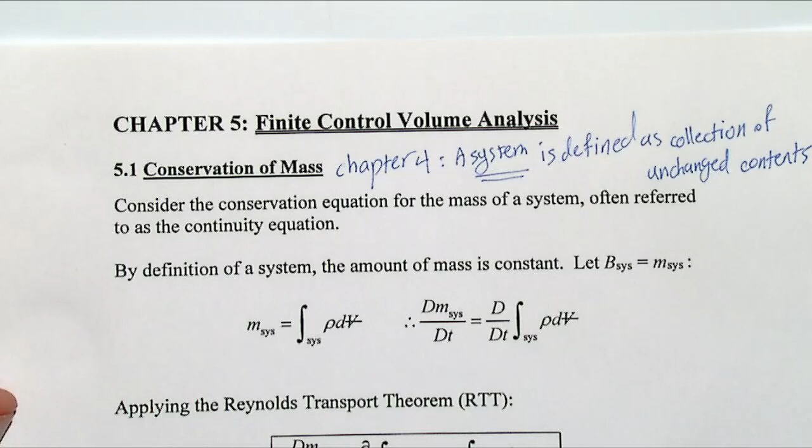What does it mean? It means you can give the particles, atoms, or molecules in a flow or fluid an identity, and say that the system boundaries are somehow defined so that this content is not going to change at all, because the boundaries move with the flow, keeping these particles inside the space covered by the system. It's like a father in a family following the kids, keeping them safe. That's the meaning of system.

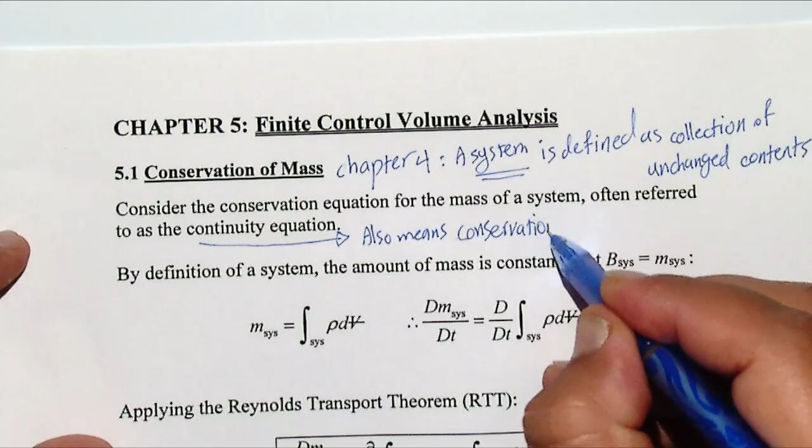If you consider the conservation equation, it means the mass of a system should be conserved, right? The continuity equation also means conservation of mass, and this is another name for the same thing. So continuity equation also means conservation of mass, there are two names for that. You can use continuity equation or conservation of mass interchangeably.

So how can we find it? First we need to define what the mass of a system is. You're going to say the mass doesn't change with time. How can you show it? You have to show that the total derivative of that doesn't change. So first, let's define the mass of a system.

Mass of a system can be defined as rho, density, times the volumetric integral dV, taken over the system, which gives you the mass.

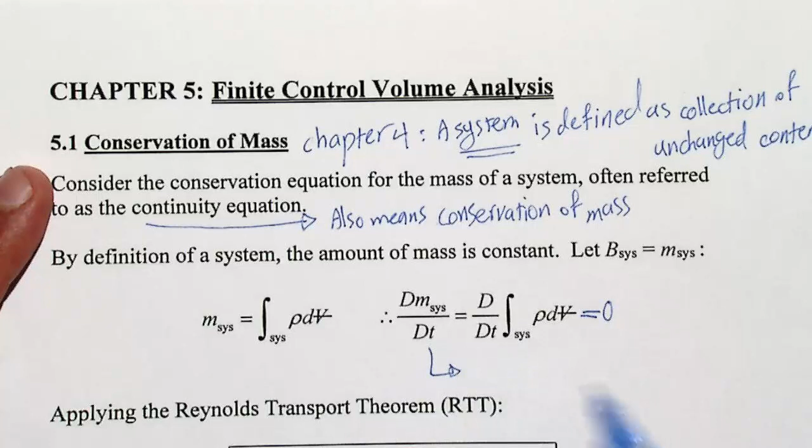Here we wrote that the total derivative of the mass of a system should be equal to, again replacing m of system with the integral equation. But what should it be? Zero. Why? Because it doesn't change. So what does it mean? It means that the time rate of change of the system mass is zero. That's exactly what it means.

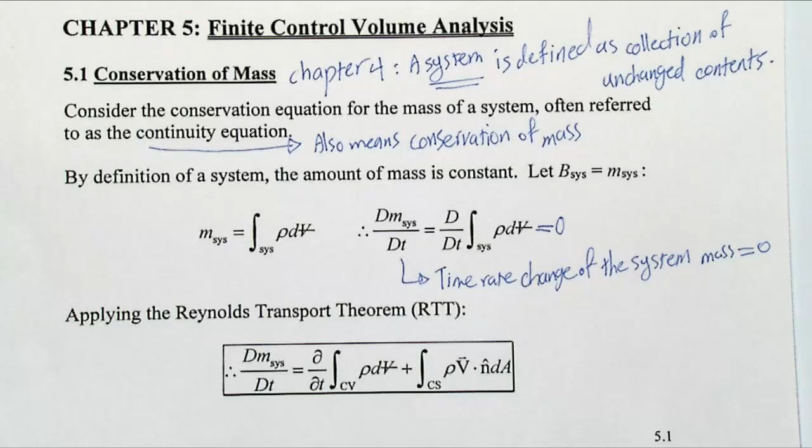Now, if we use the Reynolds transport theorem we talked about, because system analysis is based on the Lagrangian approach, but the control volume approach is much easier for us since we don't want to follow the particles. We want to answer what the flow behavior is, not track specific particles, because the flow comes in and particles change. Instead of analyzing a small or huge box moving with the system, with the control volume we stand at a specific point in space and wait for the flow to pass, analyzing it there. That's the question.

So first, remember we assumed the control volume is fixed and not moving. Why do we assume that? We assume the control volume should be fixed in space, but it's not always like that. Sometimes the system mass is moving with the flow, and sometimes the control volume also moves, and you need to answer those types of questions. We have an example for that, and you'll understand more about it. But for now, let's assume as before that the control volume is fixed in space.

So if you apply the Reynolds transport theorem, it means defining what the derivative of the mass of a system is, right?

You remember from chapter 4 how we define the Reynolds transport theorem, which is the relation between system analysis to control volume analysis. It's the time rate change of the mass of system in control volume, and also the net rate of flow of mass through the control surface. So we have three terms here: term 1, term 2, and term 3.

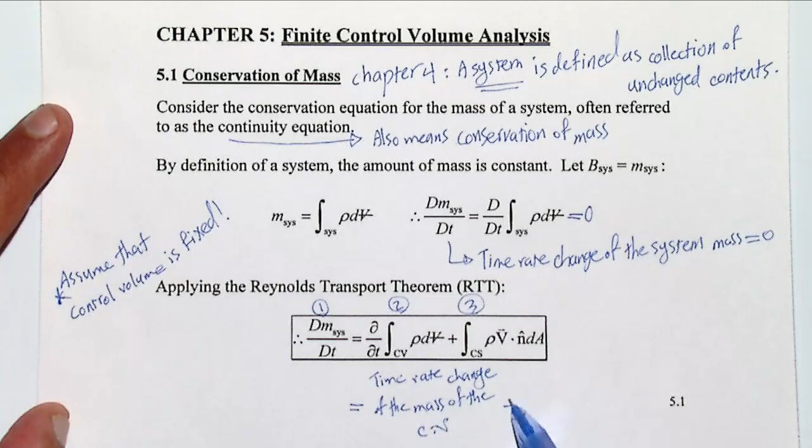If we define that, this is going to be the time rate change of the system mass, which we wrote above, but it should be equal to what? It should be equal to the time rate change of the mass of the control volume plus the net, which is term 1 and term 2, right?

What is that? It's the net rate of the flow of mass through the control surface, right? So that's the second part.

And what would be the summation if the mass of system doesn't change, as we wrote above? If you don't have any reason for that, like combustion, that sucks the mass and changes it to another product, then you can say that the total derivative is going to be 0. And if that's 0, then also this is going to be 0, right?

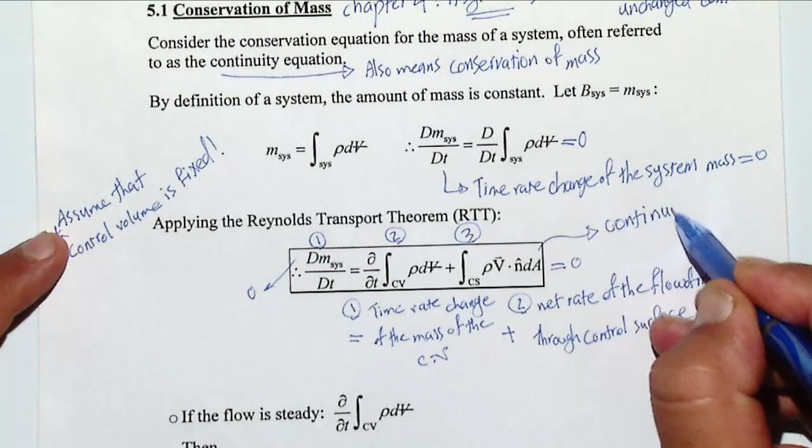And what is the name of this equation? This is the continuity equation, or conservation of mass. So that's the way you can write it down: if I'm going to apply the continuity equation, then I can apply this equation, right?

What you should do is find the time rate change of the mass inside the control volume plus how much of the mass is the net mass that is going to pass through the control surface. That's it. That's the whole thing you have to do.

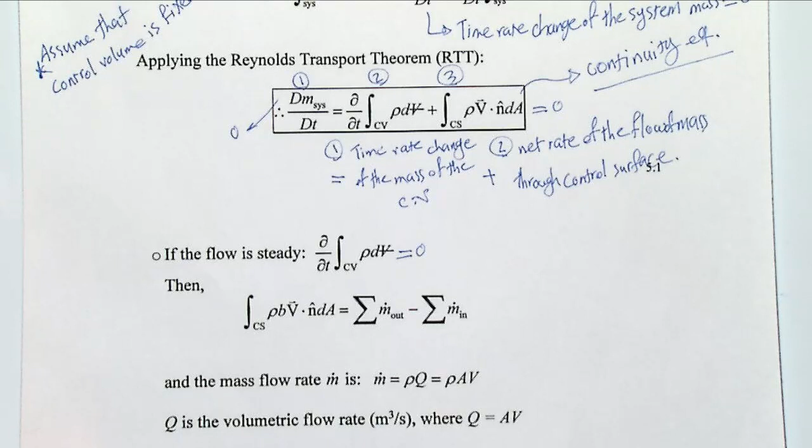But what assumptions can we apply to make it easier to solve the equation, because fluid mechanics is based on assumptions, right? So what you do to make it simpler, you apply assumptions. For example, one of the assumptions most of the time is that the flow is steady, and if the flow is steady, then the time rate change, or local term, goes to 0.

Then the only term left is the second or third term in the continuity equation, which is the integral over the control surface of rho v dot n dA, and v dot n is the component of velocity normal to the surface.

Then if you have, for example, a pipe, you can say that over the pipe wall there is no change because nothing moves over the walls, but you have only input and output. Then your velocity is always normal to the input and output, and you can find m dot out and m dot in. The summation of those, deducting the amount of mass that goes out from the amount that comes in, could be 0 if that's steady.

That's how we can apply the continuity equation on a closed surface like a pipe, where the wall or shape and input/output are very simple.

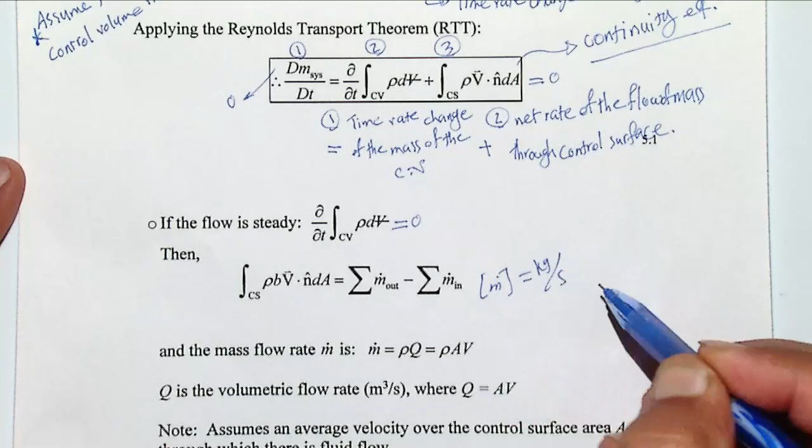Okay, so what else do we have here? We first need to define what m dot is. M dot has units of kilograms per second, which means mass flow rate, so that's the mass flow rate.

And mass flow rate can be defined using the volume flow rate. We had that before: mass flow rate is equal to density times volume flow rate, and volume flow rate is area times velocity. If you check the units, multiplying the unit of area and the unit of velocity by the unit of density, you will finally get kilograms per second.

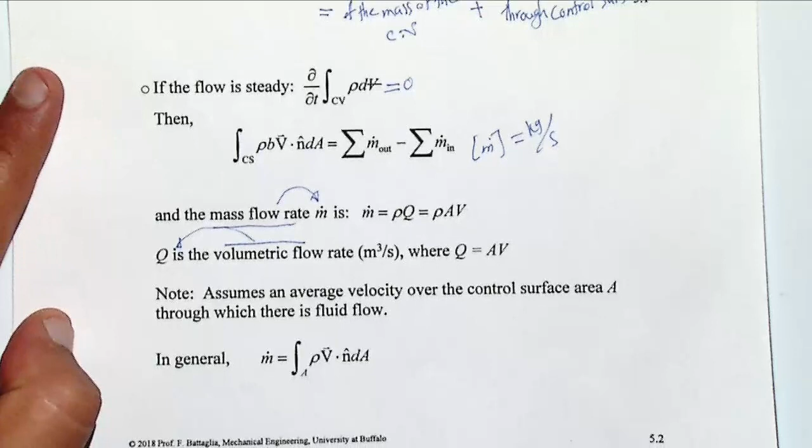What else can we assume here? If you have a velocity going out, but sometimes it's not that uniform, right? If it is uniform, then you can say v dot n is constant v, and over any differential area dA, I can apply that as just rho A v.

Why do we use rho A v? Because we assume the flow is uniform, so it doesn't matter which differential area you consider; the multiplication is going to be constant over the whole area, and you can bring it out and make the integral easier.

But how else can we do it? If we assume the general form, m dot is equal to the integral over the area, which is our control surface, of rho v dot n dA, where v dot n is again the normal component of fluid velocity perpendicular to the area, times dA. But we know this is going to be equal to rho A v, with a bar on v, because this term can be assumed equal to the average velocity. So that's how we can find the average velocity.

dA over rho A. For example, if you have flow passing through a channel or pipe with a known velocity profile, you can find the average by first defining your differential area, then taking the integral of the normal velocity over that area, summed over the whole area, divided by rho A. This gives you the average velocity, located at the center of the surface. That's how we find the average velocity.

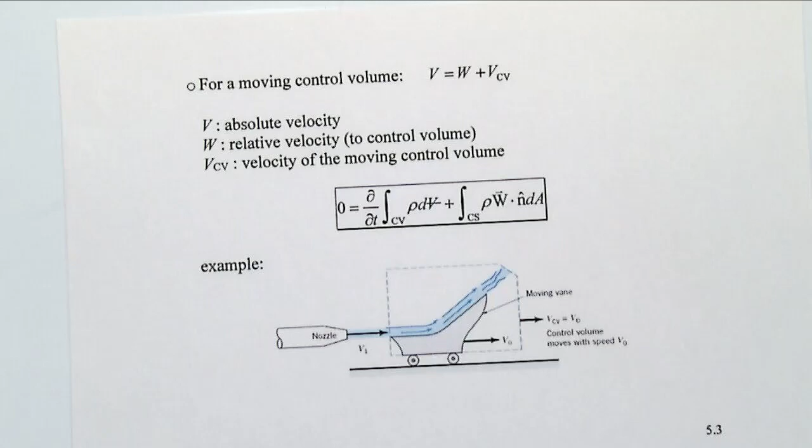Now let's move on and talk about another assumption. Previously we assumed the velocity of the control volume is zero, meaning the control volume doesn't move. But sometimes it does move, and it's easy to account for that.

For example, you have a jet that comes and hits a car, and because of the jet's momentum, it moves the car. That car is the control volume. The control volume is a space you assume as a screenshot of the flow, the space where you analyze how the flow moves.

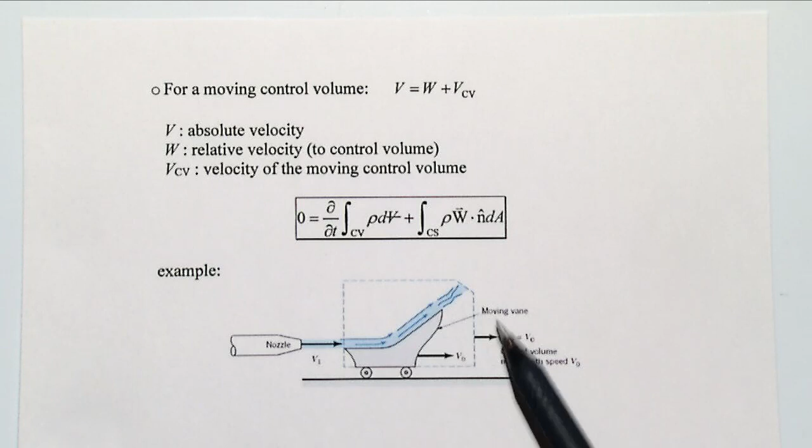So what happens if the item moves? You get a camera and stand somewhere to analyze the fluid, but if it moves, you also have to move, because you want an analysis from here to here. So sometimes the whole flow moves, and then the control volume should move too, because while it's fixed in space, it also needs to give you boundaries that stay fixed relative to the flow.

It's like getting a camera to follow your kid. You have a child playing, so you put your camera somewhere to record video of them playing. What happens if they go out of the camera's view? You need to turn the camera. It's still fixed in a space, but the main object you're analyzing is your child, and if the flow moves, your control volume should move too.

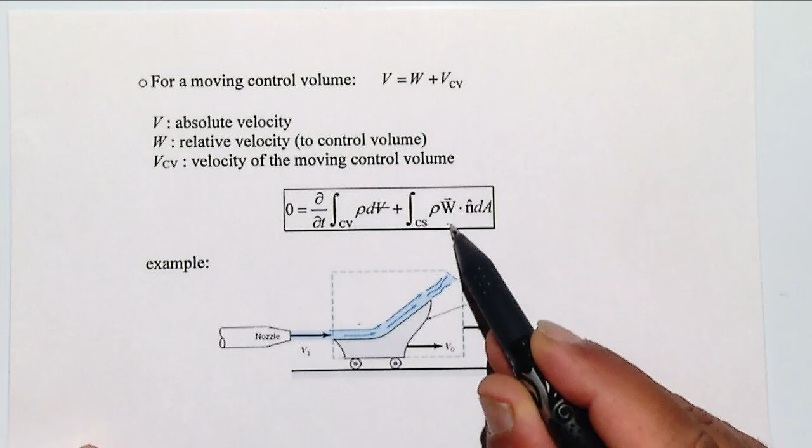So what happens to the continuity equation? Nothing, really, you just use the relative velocity instead of the flow velocity. You have a velocity where flow comes in and goes out, like v1, and another v elsewhere. Previously we used that flow velocity directly for the continuity equation if the volume was fixed, but if it moves, you have a relative velocity between the two. So you replace the flow velocity with a relative velocity and apply the continuity equation as before.

The continuity equation is still valid, nothing changes except that you now use W, the relative velocity. So again, you can say the control volume is fixed, so V0 is zero, but instead of considering the velocity here as V, I will consider it as W, and assume that this is my velocity.

For example, you have a camera and your object is a car. You get the camera and record video from the car while it's standing still and stopped. But when it moves, you're also in another car moving with it, so then you have a relative velocity.

You want to see the car, but at the same time you also should move with it because it's going to go out of the view of your camera. So maybe your object's velocity is 100 miles per hour, and you have 98 miles per hour. What you see in the camera is that the car is moving with 2 miles per hour in a direction. That's what you are going to analyze with your camera.

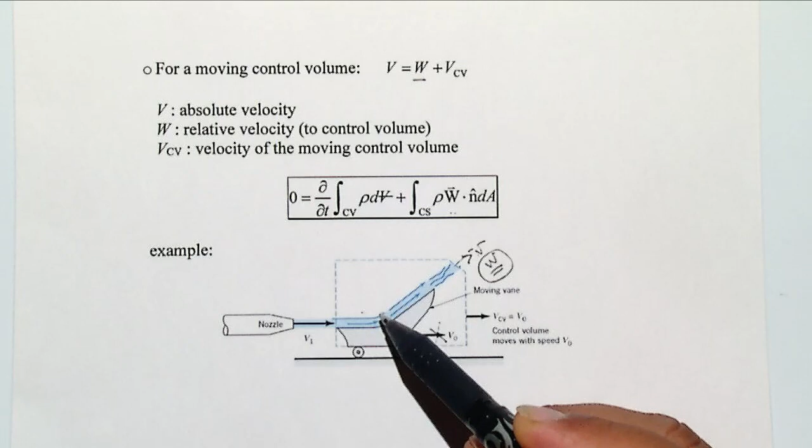Here it's the same. Instead of considering the flow passing with velocity v, you consider that the control volume is fixed. There is no velocity here, only what is the input, output, or whatever the flow is. What is the relative velocity, and replace it here in your control volume.

I'm going to talk about something much more important than the moving control volume, something mostly mathematical. If I ask you to change this equation because you have two integrals, to change it to one integral, you are not allowed to do it, because one of those is control volume and one of those is control surface.

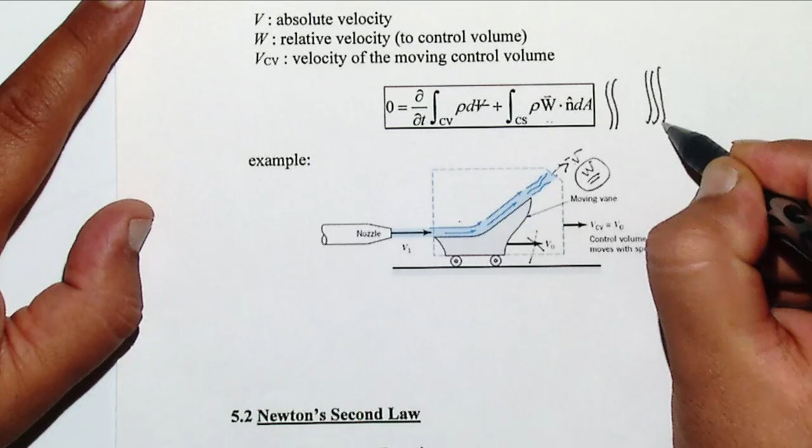So you have a second order integral, a third order integral. We'll show one with the surface, like 2 over the surface, and the other with 3 over the volume. This is going to be your volume, and that's going to be your surface. Over the surface and over the volume is not going to be mixed or merged. That's hard - you cannot merge these two.

But again, in fluid mechanics, you want to make it simpler, right? That's where the mathematics comes in and helps us. How? Using the divergence theorem. So what is the divergence theorem?

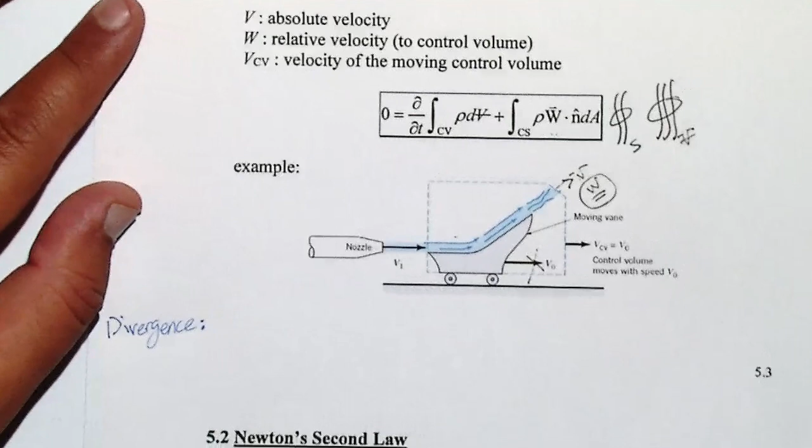Divergence theorem is a theorem in mathematics that you don't need to know how to prove - just use it, because proving a theorem is sometimes very hard. The divergence theorem changes the surface area integral, the integral over the surface, to an integral over the volume, using a gradient and divergence, getting the divergence of that term.

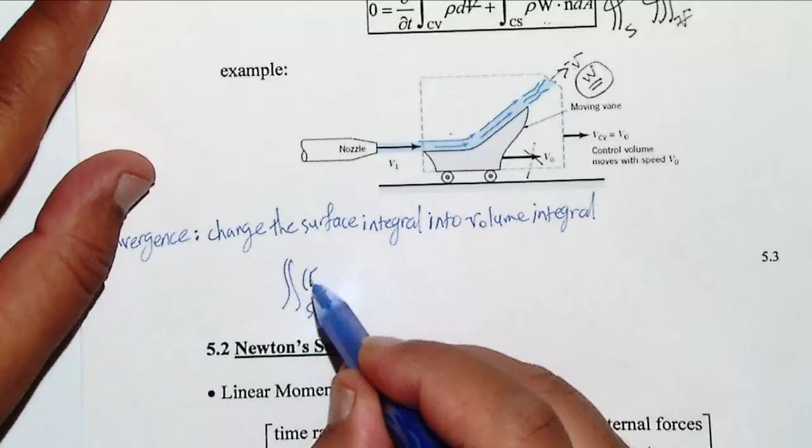So how did it change it? Divergence theorem first changes the surface integral into a volume integral. How? By using this equation: over the surface, if you had any f dot n ds, it would be equal to over the volume of the gradient dot f dv.

So if you apply that to anything that has f dot n, over the normal component of any parameter or any vector normal to the area, then you can use the divergence theorem and get a volumetric shape of it.

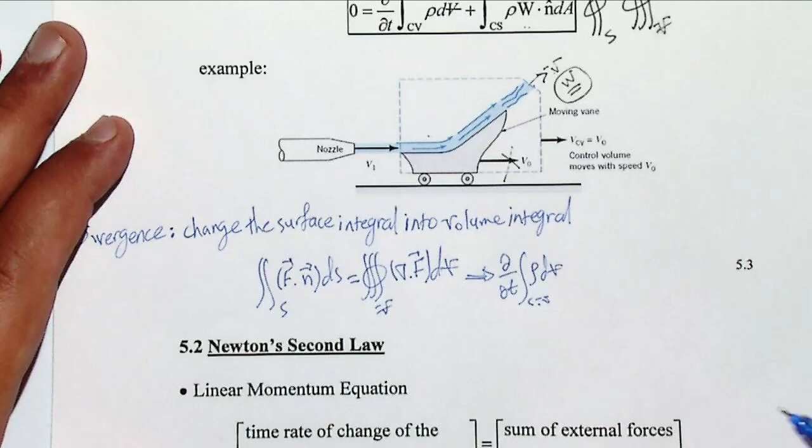So how can we apply that? What will happen here? It's easy. In the continuity equation, the first term, which is the integral over control volume of rho dv, we keep that - nothing is going to change.

But the second term, which is rho v dot n ds - rho is out of the v dot n, and will be considered after that. If we say rho v is going to be our f, then we apply the divergence theorem to make it control volume, and the integral is going to be over dv, but here it would be gradient dot f, gradient dot rho v.

Why did we do that? Because we are going to merge these two and say now I can write it as one integral over control volume, one term, because now I can sum up these two - the dv is the same and both integrals are over the volume. So: d rho/dt plus gradient dot rho v, dv, equal to 0 - that's the continuity equation.

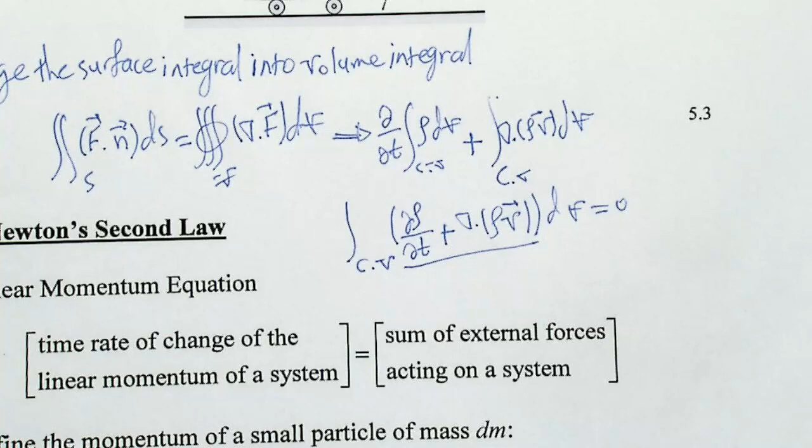So now I've changed that to this form. I will show again how you can make it simpler and bring rho out with some assumptions. But for now, just keep in mind how we can merge these two integrals - one control volume based, the other over the control surface - into one integral using the divergence theorem.

Up to here I wrote down how we can bring rho out and merge it with this one, but that's an additional topic because it's not part of this chapter. I only need to give you a hint, because I'm not going to teach chapter 6 for this course - we don't have time for it.

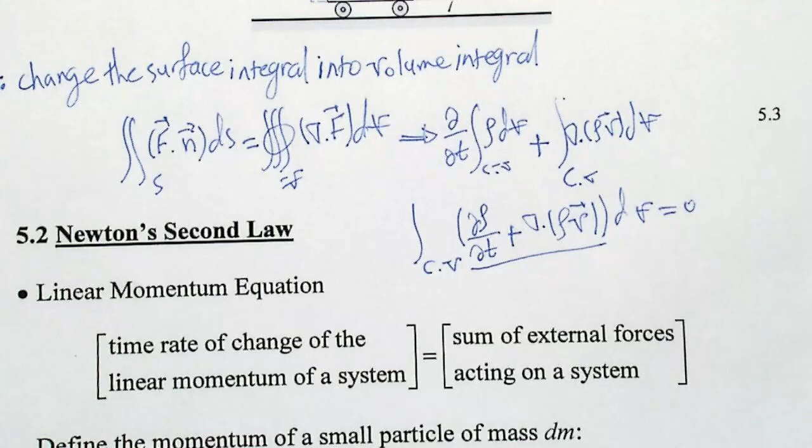So just only two, the most simple but most important terms that you have to learn in this course. If you say you're going to pass fluid mechanics, you have to know it. And that's two terms: dilatation rate and vortex, and the angular velocity component. We'll talk about it later. So till here we talked about the continuity equation.

Okay, now what's next? Next is Newton's second law, which is linear momentum. We say that rigid body motion is valid here in fluid mechanics, so we are going to apply that over the fluid, and again over fluid particles, and then using the system or Lagrangian approach, using the transport theorem, Reynolds transport theorem, bring it extended to the whole flow. That's what we are going to do.

First, linear momentum is going to show that it's based on rigid body motion: the time rate change of the linear momentum of a system is equal to the sum of the external forces acting on the system. That's Newton's law. If you have a net force, then the momentum is going to change in the direction of that force. Net force direction is going to change your momentum in that direction.

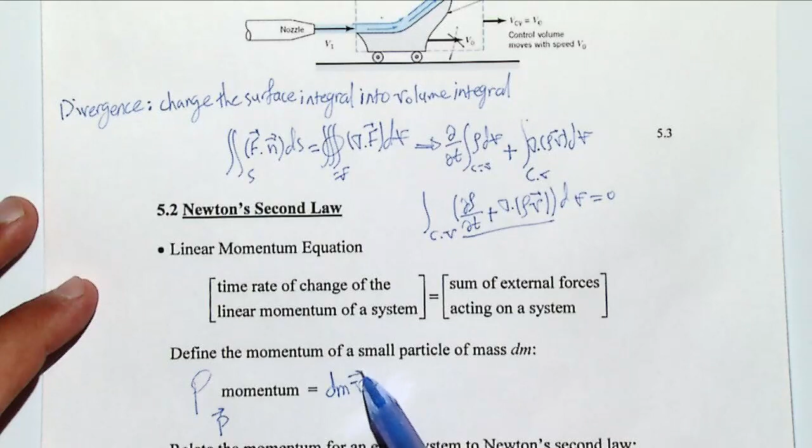What is the momentum of that? dm times velocity gives the momentum, and the name of momentum is capital P. We wrote capital P because the book used that, and momentum is a vector, right? It is equal to dm times velocity. It has to be a vector because mass is scalar, and velocity is a vector, and if you multiply this, you will finally have a vector. That's why momentum is also a vector.

But dm could also be replaced by rho dv. So if we use this, we can have the momentum of that small particle, that is p, equal to rho velocity dv.

So if our system moves with this particle, then we say that the momentum, over time, the total derivative of that should be 0, or should be equal to the force, right? Because that's mentioned here for rigid body motion. Then we can say that d over dt of p, or momentum, should be equal to the net force acting on the fluid particle. That's valid because that's the meaning of Newton's second law.

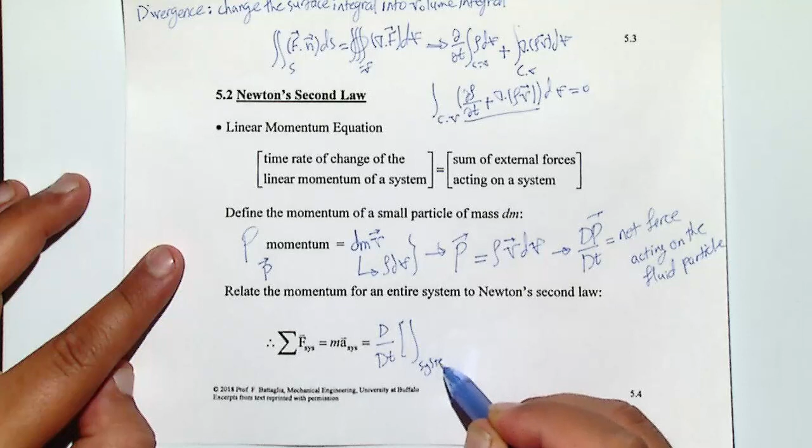So in this system, we can replace the net force with the mass times acceleration of the system, right? And you can write that sigma of all the forces, which is our net force, is equal to d over dt of the integral over the system of rho velocity dv. That's what we can write down here using Newton's second law.

And what else do we need to do? We need to use the Reynolds transport theorem, transfer, which moves from system analysis to control volume analysis, or Lagrangian approach to Eulerian approach. Find this equation like this one, and then we can also apply the divergence theorem and merge these two integrals and have a final equation for control volume, right?

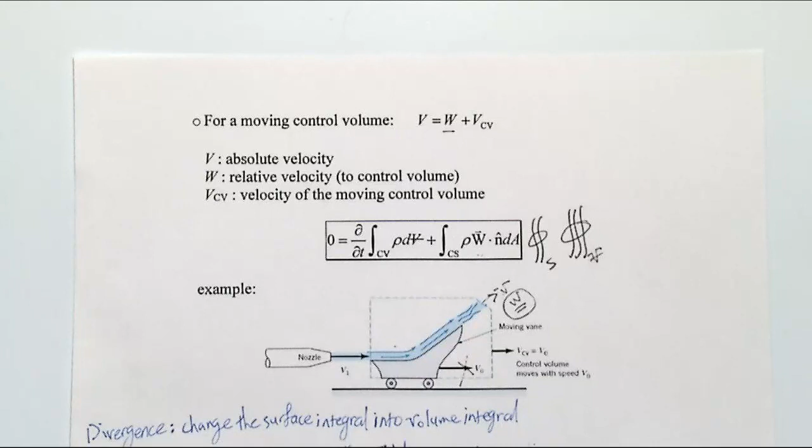Again, both of them are going to work. Mostly in the homework that I gave you, you have to use the dA form because that's much easier. But control volume based, or merging these two, are going to give you the Navier-Stokes equation, which is for chapter 6, and we don't have time to cover that right now. But you will see different versions of the continuity equation, and since those are highly mathematical with the terms, it makes you mix these two, thinking oh, these two are different, but these are not different. These are only using the mathematics to merge the integrals and rewrite the equation. But again, the meaning of that is the same: continuity equation and momentum equation, based on this first and second Newton's law.

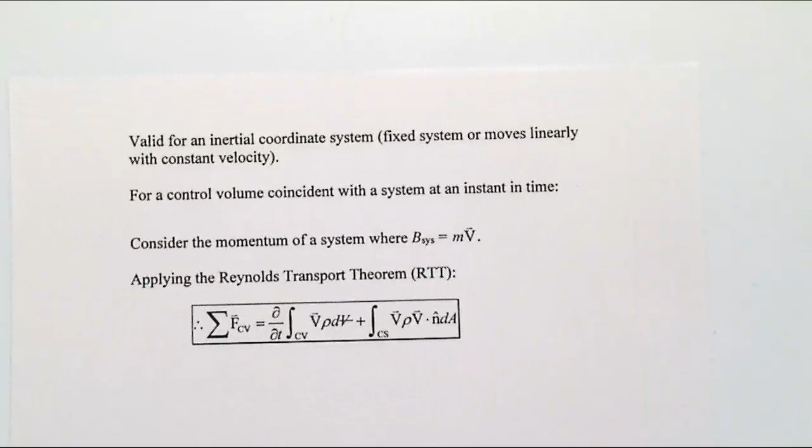So here, what we can do is apply the Reynolds transport theorem on the equation that we have. If you apply that, then the force over the control volume is equal to the time rate of change of the momentum in the control volume, plus the amount of momentum that passes over the surfaces.

Okay, so this is the same, and then we can apply the divergence theorem and have a better shape of it, merging these two. And again, you can write that sigma F of the control volume is equal to the integral over the control volume, bringing the rate into the equation, and you will have v rho, or rho v, doesn't change anything, and then plus the gradient, because this is going to be your f now, gradient dot v rho v, and finally all times dv.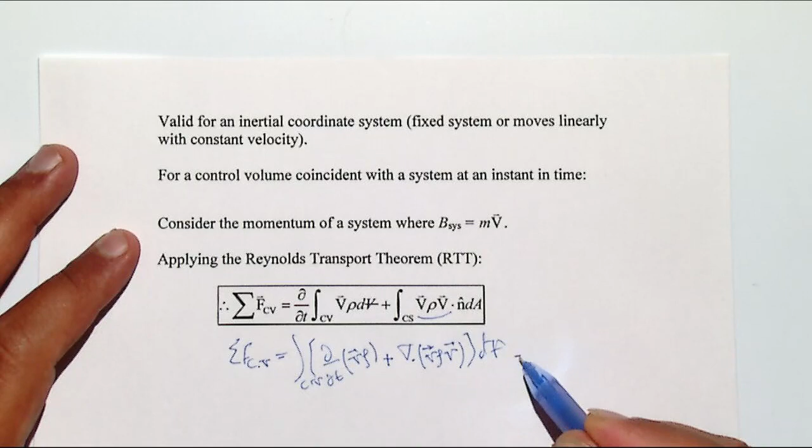That's it, you merge these two integrals. Also, mathematically you can bring one of the rhos out and make it simpler, but right now don't worry about it, because it's not part of this chapter or any part of this course.

Okay, so what else? We are going to define what are the forces on a control volume. What type of forces act on a control volume? We have two types, or sometimes you can assume three types, but generally it's two types: body forces and surface forces.

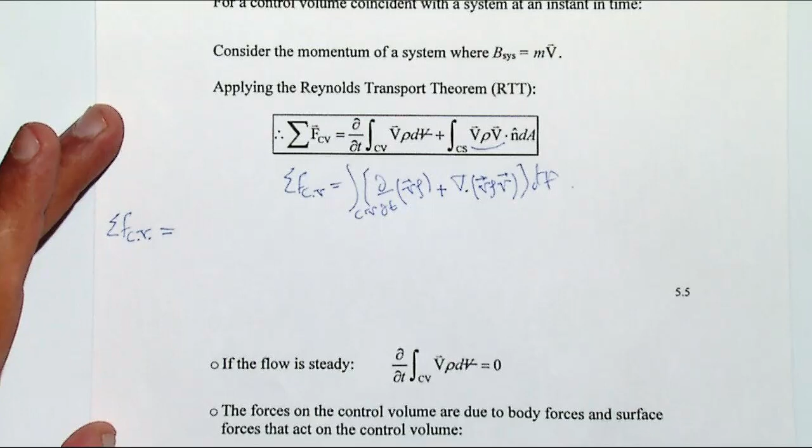So the sigma of CV, or control volume, is generally two types: surface forces and body forces.

For example, pressure force is a type of surface force. Tau, that's the friction type force, is a surface force, but weight of the fluid is a type of body force, right?

These are different types of forces, and all have to be summed up, and the net of those should be equal to the change in linear momentum in the control volume, which is equal to the net force acting on the control volume, which we write down here.

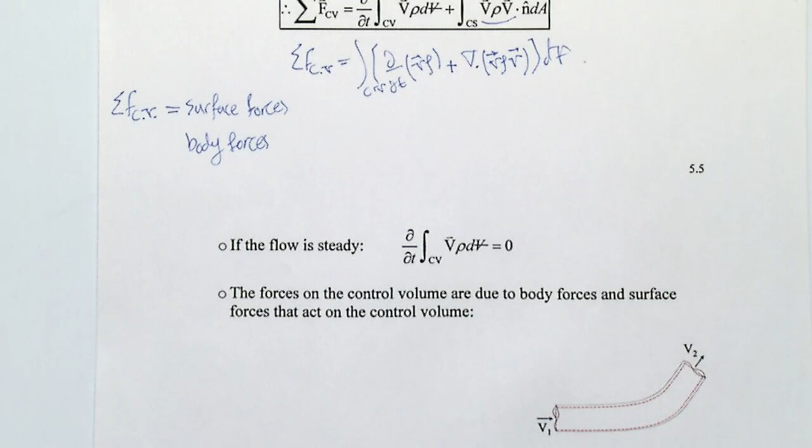Okay, so again we are going to talk about assumptions. What is the first assumption we can apply here? If the flow is steady, then the time rate of change of the linear momentum is going to be zero.

What else? Just defining the forces, then we can write it down: what is the amount of the net flow of momentum over the control surface? Then the sum of all is equal to the net force acting on the control volume.

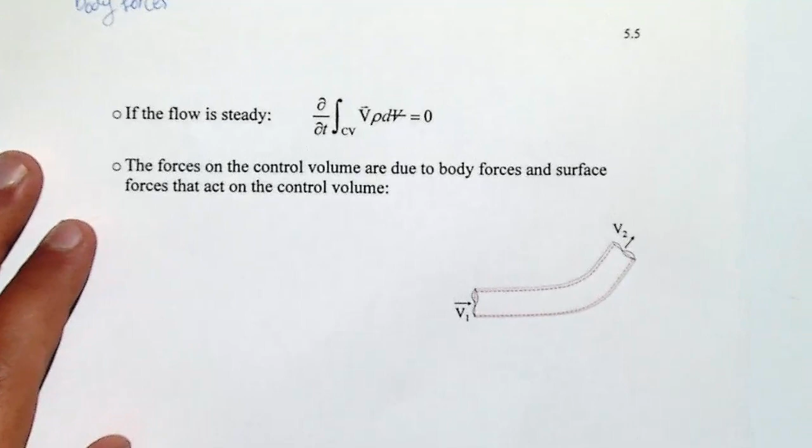So here, in this simple example, I'm going to write down the different types of forces. That's why you need to analyze.

First, define your control volume. That's the first thing you have to do. First, define the control volume, and we show it with this. Okay, that's my control volume.

What is the control volume? That's also part of the question, how you define the control volume. You have to decide where your boundaries are, and what space you are going to analyze. Sometimes just defining the control volume changes your question from a very simple one to a very hard one. If you define the boundaries in a bad way, then analyzing it is mathematically very hard, or sometimes impossible.

But only by putting the boundaries in the correct point can you make assumptions that simplify the solving of that question. First, define your control volume, and we write it down here with the red dash line. And let's write what is the... okay.

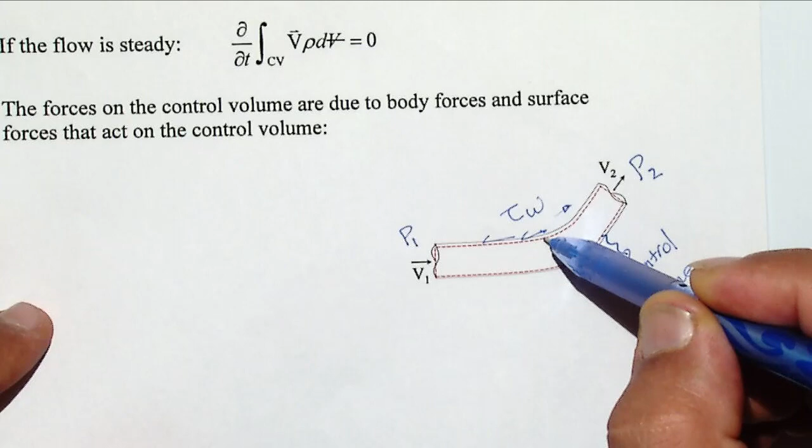So velocity comes in, comes out. You have pressure 2 here, pressure 1 here, and you may have the tau at the wall. Tau at the wall is the force the fluid acts on the wall in this way, but the reaction of that is going to apply on the fluid in that way.

So that's a type of reaction force. That's why sometimes they categorize the forces into three: surface forces, body forces, and reaction or external forces. These are not really different - the tau is also part of surface force. In general you have body force and surface force as the most important ones, and tau or friction force is part of surface force.

Okay, so what are the forces here? First, another force we have is the W of fluid, which is gamma V - that's the weight of the fluid. So the body force in this case is fluid weight.

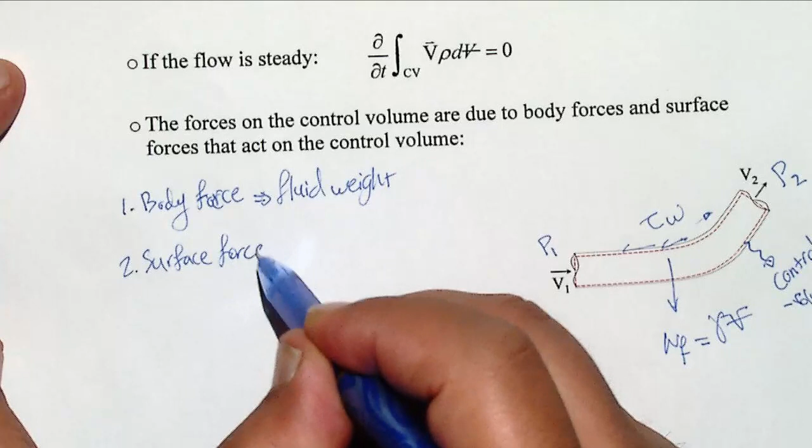And surface forces: one is P1A1, which is here, right? That's the pressure at this area, and it's going in this direction. And another one is here in that direction. So P1A1, P2A2. Also another type is tau of the wall times the whole area of the wall.

And also, what else do you have? If that's your control volume, you shouldn't say you just have a wall here. In the analysis you'll understand that, okay, I have a pressure here, and also I have a pressure here. If you have atmospheric pressure all over the space, then you have a pressure force on the wall and also on the control volume.

All of these are going to cancel each other out. That's why we don't consider atmospheric pressure, because you have atmospheric pressure here and here. You don't need to assume that, as long as the atmospheric pressure is everywhere. These are your pressure forces on the wall, and here also you have it, but the summation is all going to cancel out because one has a corresponding force in the other direction. That's all the forces.

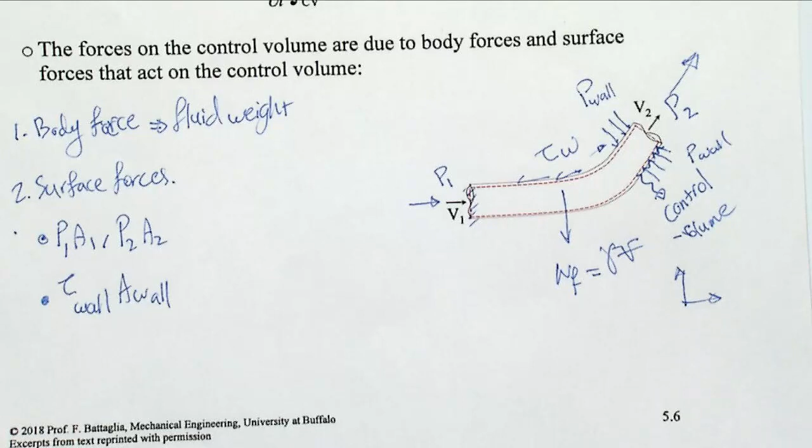So how do you do that? Okay, I will write down all the forces here. First you need to assume what is x and y. So I'll assume x and y are here, that's my x, that's my y. And because that's direction based, you have to write down what is in the x direction.

For example, in the x direction, one force is going to be P1 A1, it's simple. What else? One component of velocity, P2 A2, if that's the angle, there is an angle here, right?

So it's theta. The other one is in the other direction, so this is going to be your component, and it's going to be negative. So minus P2 A2, if that's theta, so that's going to be times cosine of theta. Okay, that's also another force.

What else? You have to sum up all the tau, and if the angle is for an arbitrary shape, you have to get the integral over the area. So it's going to be negative, integrated over the area of the wall, tau wall times dA.

What else? You have the fluid, but the fluid in the y direction. Also one of the components in the y direction is the pressure forces. You don't worry about those because we're only writing in the x direction.

What else? Now you have to write how much the momentum is changing over the control volume. Since it's steady, and you assume it's steady, the first term is going to be 0. What about the second term? You have to write down how much momentum comes in and goes out. If that's velocity, you will see that n here is going to be in this direction, so v dot n is going to be negative.

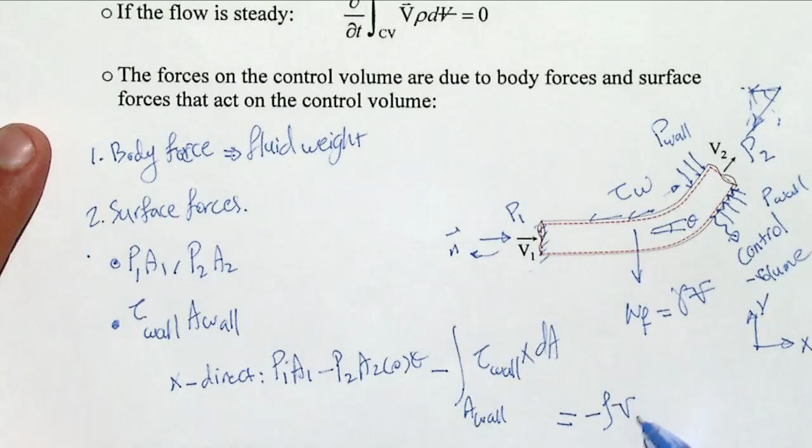Minus rho v1 squared times the area A1 is going to be the amount of momentum that comes in with a negative sign, plus here is going to be positive because n and v are in the same direction, and rho v2 squared times A2 is going to be the amount of momentum that goes out.

So that's it. You have an equation here, then you can find, for example, what is the velocity that is going in or going out. That's the way you can solve questions in chapter 5 based on the continuity and momentum equations.

In this part, it's much easier to use the surface approach without the divergence theorem, like the first one. But using that other method is going to be hard. That's why we have two versions, and you have to decide which one is easier to use based on the question. It all depends on the question. But for this chapter, and for this course, you will mostly use the first one.

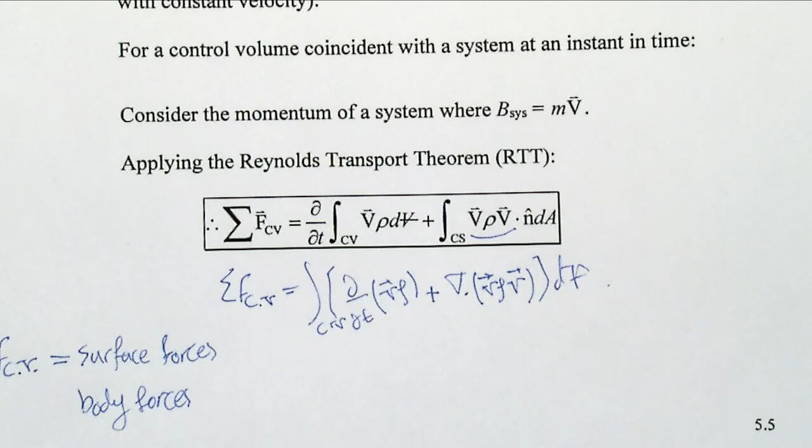This is only for you to know more about, and for your future, but the first one is mostly used because the questions we discuss, in the exam and also in homework, it would be much easier. Don't worry if you couldn't understand this part, but you will need it in the future if you do research in this area.

Okay, so I told you before, fluid mechanics is based on assumptions. What does it mean, based on assumptions? You have to make assumptions and make it simple. That's it, that's the whole thing about fluid mechanics.

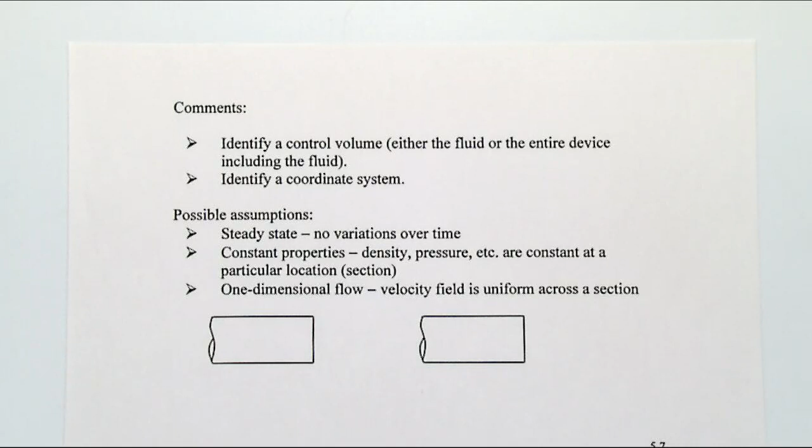The comments are going to help you solve a question in this chapter. At first you have to identify a control volume. It could be the entire device, it could be the fluid, it's based on your assumption and your question and your solution. It depends how you are going to solve it and what control volume you have to decide. By solving different questions, you will know more and more how you can define the control volume.

Then you need to also identify the coordinate system. Why? Because you can define which is the direction, and if you remember from the example that we saw for the arbitrary channel, you will need it because these are velocities and momentums, and those have a direction. So everything is based on direction.

What else? You can make possible assumptions like steady state, no variation over time, so that first term is going to be zero, or you can say density is constant, then the flow is incompressible, then I can make it easier and bring the rho outside. What exactly I did in the question: I assume the flow is uniform, then for rho v squared, I bring the velocity out, the area out, and make it simpler.

This is one of the assumptions I applied, that the flow is one dimensional and not changing across the section. That means the flow is uniform. If the flow is uniform, the velocity all over the cross-section area is equal. So this is going to be a uniform velocity profile.

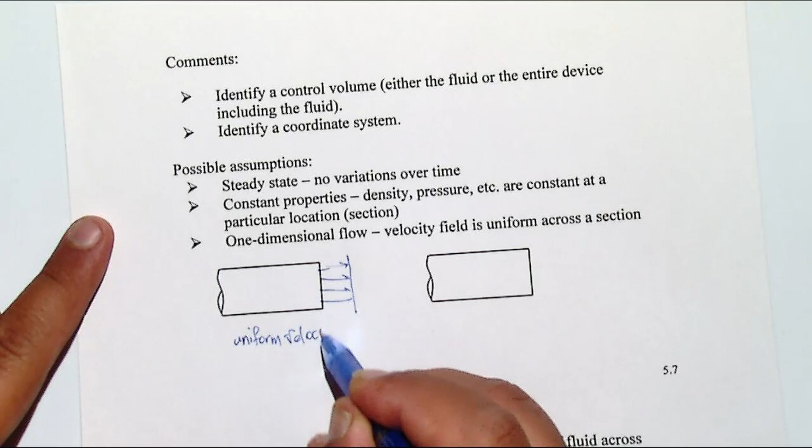But sometimes you don't have it. You may have a non-uniform one. If you have a non-uniform profile, you can assume the average velocity somewhere there and make it easier, or you have to get the integral and solve it mathematically. But it all depends on that.

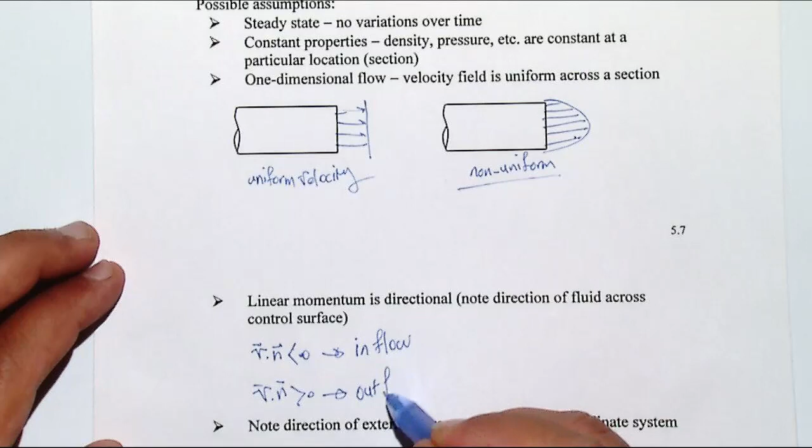What else can we assume to make it easier to analyze a control volume system? Linear momentum is directional, so the direction of fluid matters when it's going out or going in. You have to know that, same as before, when v dot n is negative, that's inflow, and if v dot n is positive, that's outflow. Same as before, we applied that for chapter 3.

And what about the forces? Direction of external forces with respect to the coordinate system matters. That's the example that we wrote down. We solved that for an arbitrary shape, but here we make it easier and rewrite it.

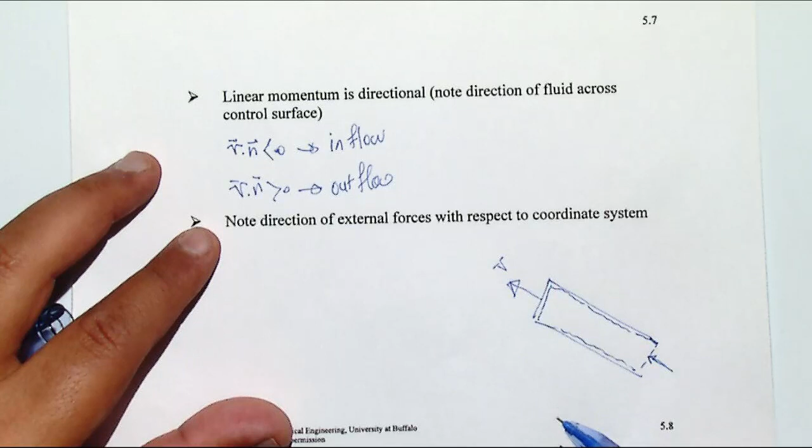Absolutely, if you consider you have a boundary velocity here for the control volume, you have to also assume that you have another velocity down there. But it just wants to make it easier and solve for only one of the surfaces. But yes, when you close your boundaries here, you cannot assume it's infinity and going for a long pipe. You have to cut it somewhere, and that's your control volume. You are limited in space, and you have to assume where your control surfaces are, and since you have a velocity coming in, then you have a system or a fixed control volume here, and then you are going to analyze that.

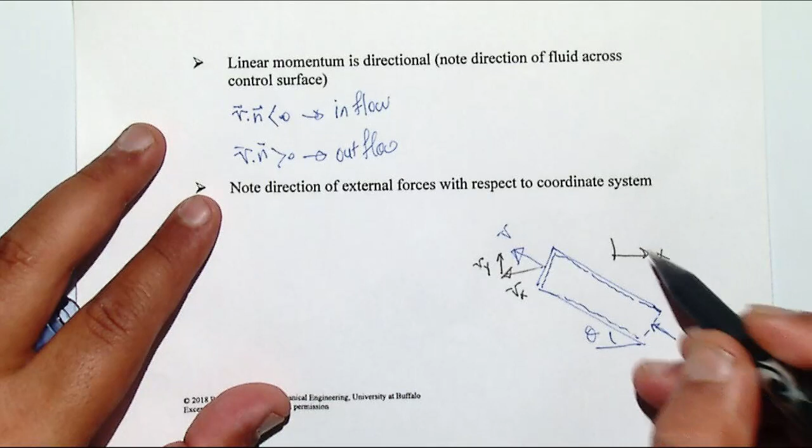But if you have an angle here and a velocity there, this velocity has two components, Vx and Vy. If I assume this is my x and y, then Vx is going to be negative here, and here Vx is going to be positive, Vy going to be positive. Same here when it comes in, two components of velocity. So if that's V1, we can write V1 and then V2 here, for example. This is going to be V2x and V2y.

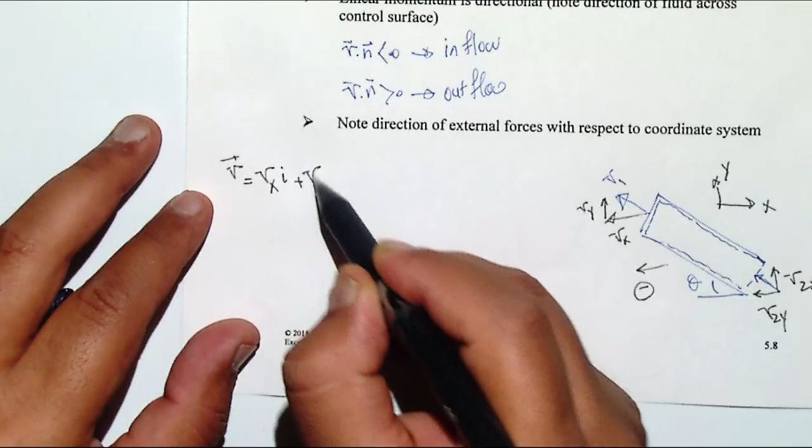This is the negative direction in x. So you can write at first what are the components of velocity. You can write it as vx*i plus vy*j. Just consider that I'm writing that for v1. These are only examples. So what would be vx? Vx is going to be minus, because that's the negative direction, times the magnitude of the velocity times cosine of theta.

If that's theta, then this is going to be your theta, and v is the amount of velocity times cosine of theta. And what about vy? It's going to be amount of velocity times sine of theta.

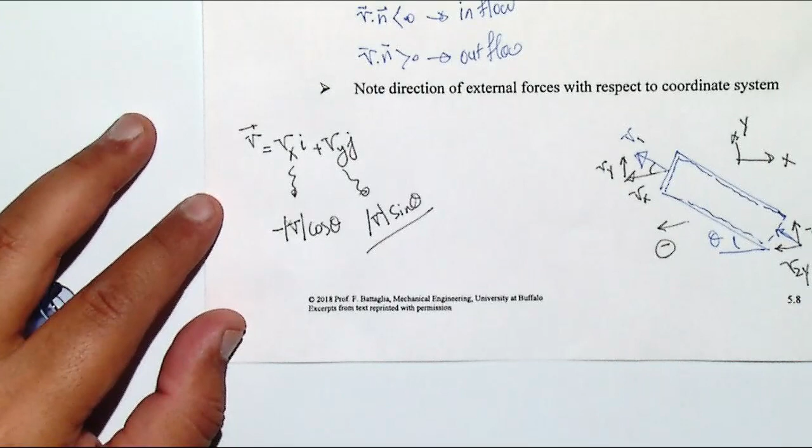You replace that, and in integral form you can apply that in x and y direction. How? You assume this is a steady state flow, so just applying for output. We'll talk about input and the whole question later in the examples, but let's apply just for output. So the time derivative term is 0, and then you only rewrite the second integral, which is the control surface term: velocity, rho v dot n, times dA.

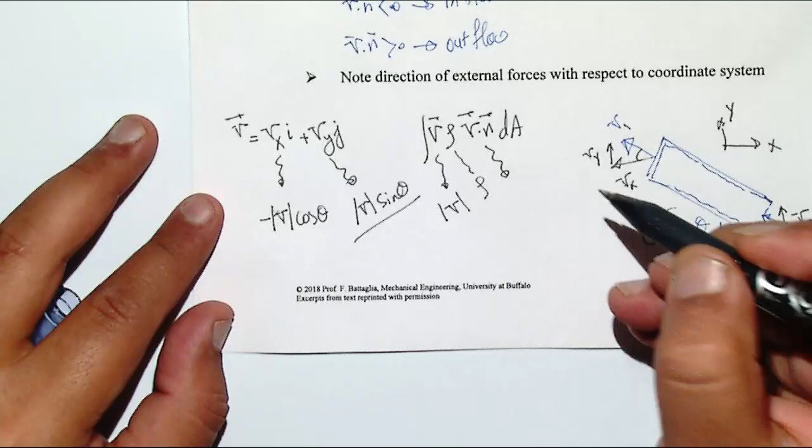So if you write it down with the amount, v is the amount of v, rho is rho, and v dot n depends on the direction. If you write it down for the x direction, it's going to be minus v cosine of theta. And what is dA? If you assume a uniform velocity profile, you can multiply that by the area.

So in this output you have one term in the x direction, which is the multiplication of all these: minus v cosine of theta, times rho A v. Rho A v is your m dot. And this is your vx. Then in the x direction you will have m dot vx.

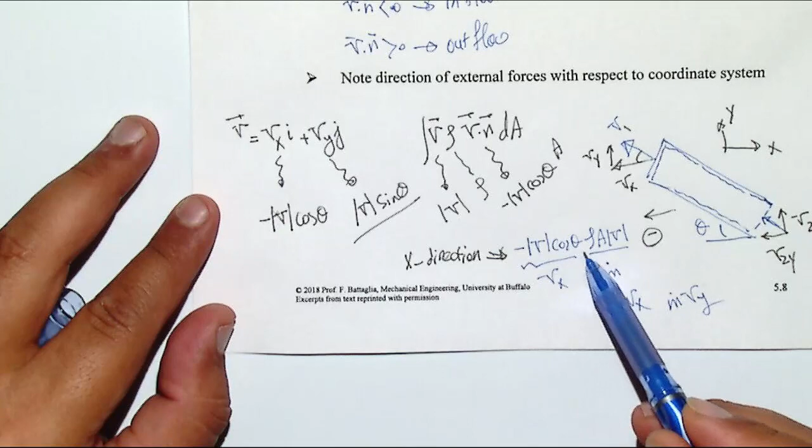What about the y direction? You will have m dot vy, the same multiplication: sine of theta times rho A v. That's for the second term.

That's it, that's enough for now. We'll solve a bunch of questions next class. I'll show you how to apply it in a real question and how to make it simpler and solve it. But before the end of this class, I'm going to talk about two additional topics here.

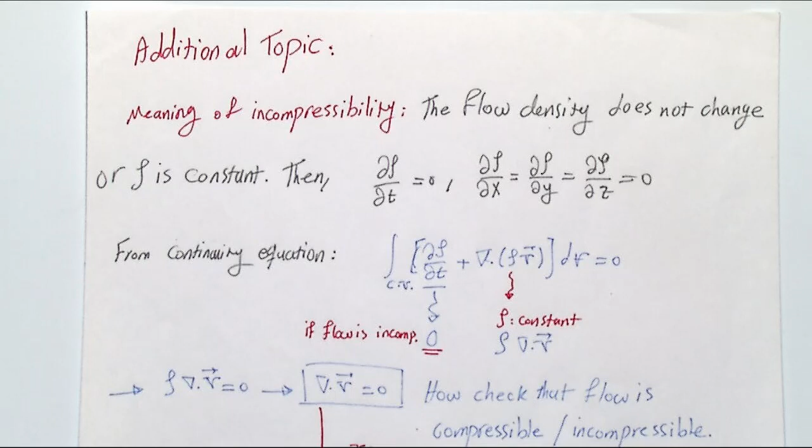One is the meaning of incompressibility. So what is the meaning of incompressibility? Incompressibility means the flow density does not change, not with space and not with time. So it's totally incompressible, meaning rho is constant everywhere in the flow and also over time. So if rho is constant, then all the derivatives are going to be 0. Perfect, so you can apply this.

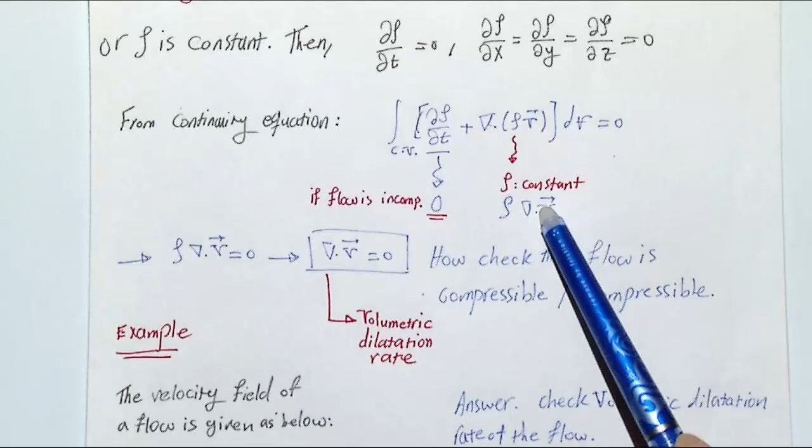Let's write down the continuity equation here. If you write it down and apply the divergence theorem, you will have, based on the control volume, one integral: time derivative plus gradient dot rho v in the dV, which is going to be 0. Since rho is constant, assume that rho is constant, then all the derivative terms go to 0, and rho being constant comes out from the gradient. This is 0 because the flow is incompressible, and rho being constant comes out, so finally you have rho gradient dot v.

So this is 0, and if the integral is going to be 0, then the only term that remains should be 0. If that's 0, then we can write that rho gradient dot v is going to be 0, and since rho cannot be 0 - density is not going to be 0. If density means 0, it means that for a volume of fluid, your weight or mass is going to be 0, which is not possible for a material. It would mean that you don't have anything there, so it cannot be 0.

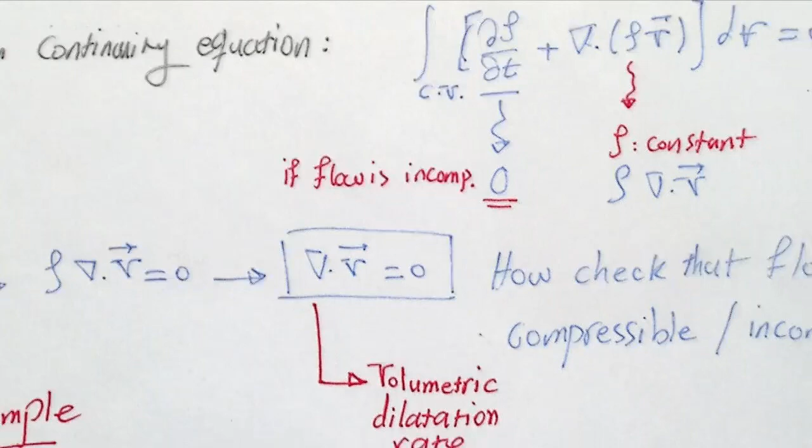Then the only term that is 0 is gradient dot v, which is the volumetric dilatation rate. That's simple so far but very important. Why? Because when you have a velocity profile, if you get gradient dot v, or find the volumetric dilatation rate, and it's 0, you can assume the flow is incompressible. If it's not 0, you cannot say that - you can say it's compressible.

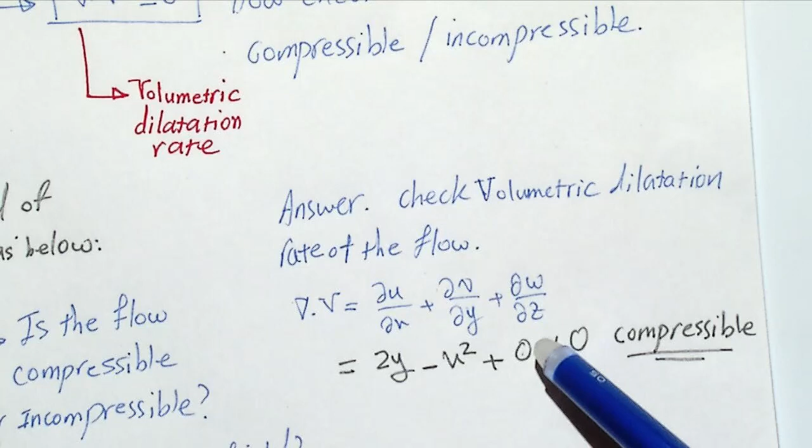For example, a velocity profile is given: u is 2xy, v is minus x squared y, and w is 0. Just assume it's 2D. So the question asks whether the flow is compressible or incompressible based on the flow velocity. What you should do is check the volumetric dilatation rate and find it. So gradient dot v is du over dx plus dv over dy plus derivative of w versus z. What is the derivative of u?

Derivative of u versus x is going to be 2y. And what about this one? Derivative versus y is going to be minus x squared. So the answer, and also this is 0, so that would be 0. What would be the answer? 2y minus x squared. It's not 0.

Absolutely, if y and x are 0, it means that for a single point in space, yes, it would be incompressible. But we are not talking about a single point, we're talking about the flow. Flow has a space, it has time, and you're not getting that. Only for one point, mathematically, would this be incompressible, but not generally. So the answer is yes, the flow is compressible because the dilatation rate is not 0.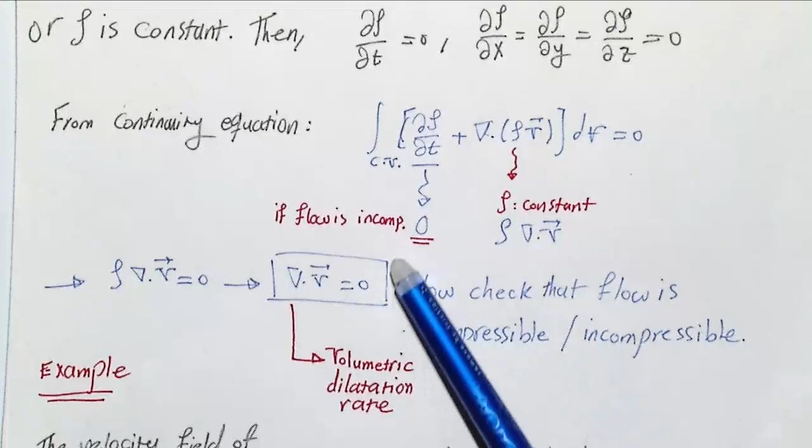Why does a nonzero dilatation rate mean compressible? It comes from the equation of continuity. We found out and proved that if rho is constant, then gradient dot v is going to be 0. So that's the divergence of the velocity being 0.

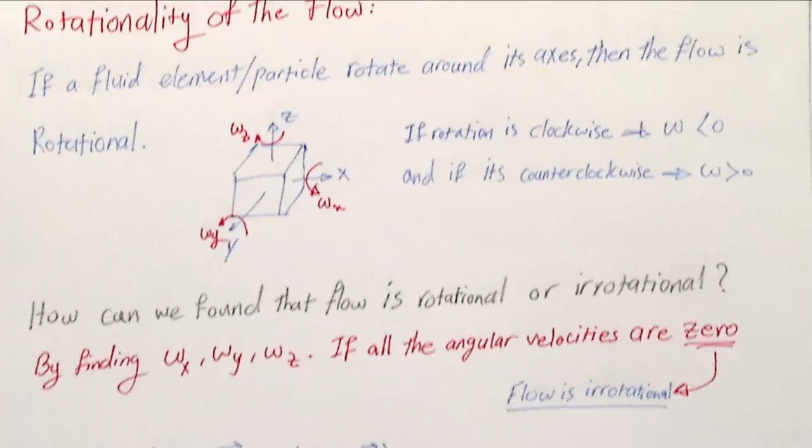Okay, that's one part. The other meaning I'm going to talk about is not vorticity now -- vorticity is more complex -- but finding the angular velocity, the meaning of rotationality or irrotationality of the flow. So we have two things.

Let's say you are running on a track field. You have a rotation when you are running. Assume that you are a particle in a fluid, running over a track field like a professional, fast moving. Because of the turning of the track field, you are turning as well. That means the flow is circulating -- you have a circulation there because you are moving in a turn.

Since you are doing the turn, I'll write it down here -- that's my track field, and you are running over that. Since you are running here, for a constant point, someone standing there, like your friend, sees that you are turning.

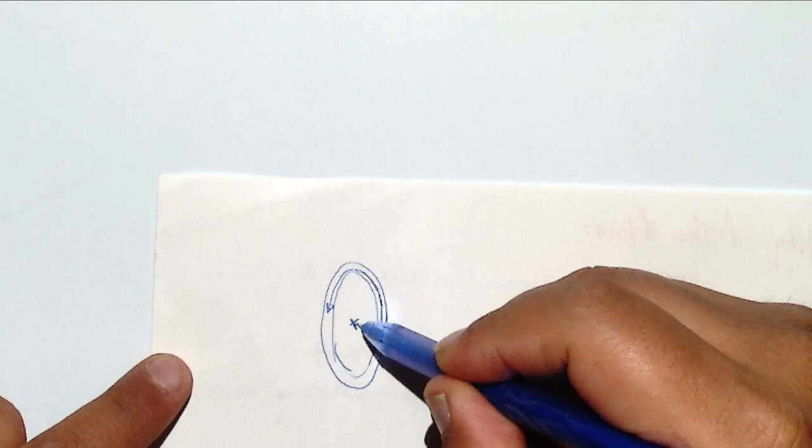So you have a circulation, but that doesn't mean that you are rotating. The meaning of rotation and circulation are different. Circulation means that the flow is circulating over a center, and you can write the radius there. But if you're running over this field and at the same time turning around yourself while running, this turning around yourself is going to be rotation.

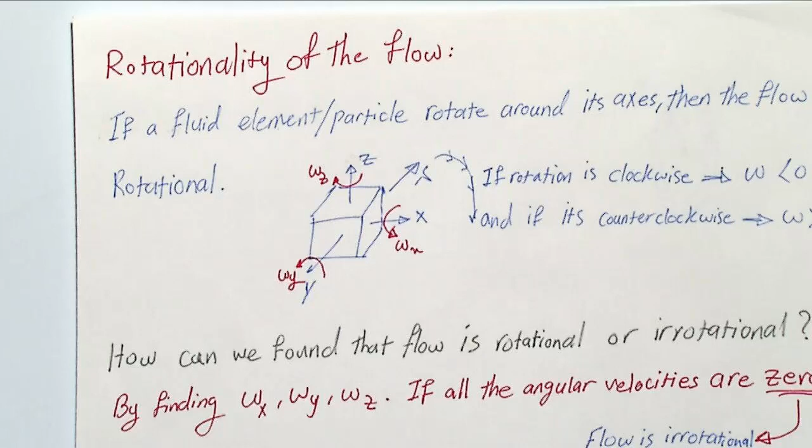So here, for a particle: the particle may move in a way that has velocity in an arbitrary direction, and also, zoomed out, you may have a circulation like turning. That doesn't mean that your flow is for sure rotational. Rotational means that at a point, or in general, the component or particle of velocity is moving around itself, or turning around its own direction.

So if the particle has an angular velocity about any of its main directions or axes, then you will have rotation there, and the flow is rotational.

So if you see a sink, for example, and the flow goes over the sink hole turning like that, this is circulation. It doesn't mean the particles of the flow are for sure turning around themselves as well. No, they are not -- they are moving smoothly, turning over the general direction. Only if they are turning about any of their own axes is your flow rotational. That's the meaning of rotationality of the flow.

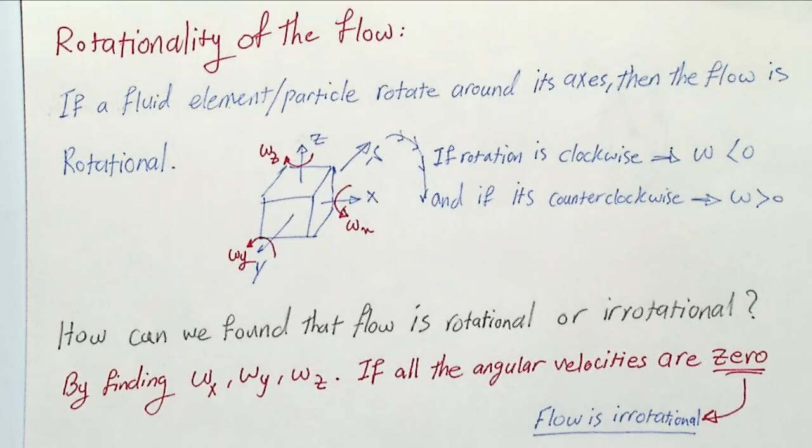But how can you check and find out that the flow is rotational or irrotational using the velocity field? That's the question we're going to answer.

At first, let's talk about the parameters. If you have z, y, and x directions and you have a rotation over there, then you have an angular velocity, shown by omega. If you have omega-x, that means you have a rotation over the x, or y, or z axis. If that's clockwise, then the angular velocity -- this is just a convention, but all the books use it -- is negative, and if counterclockwise, it's positive.

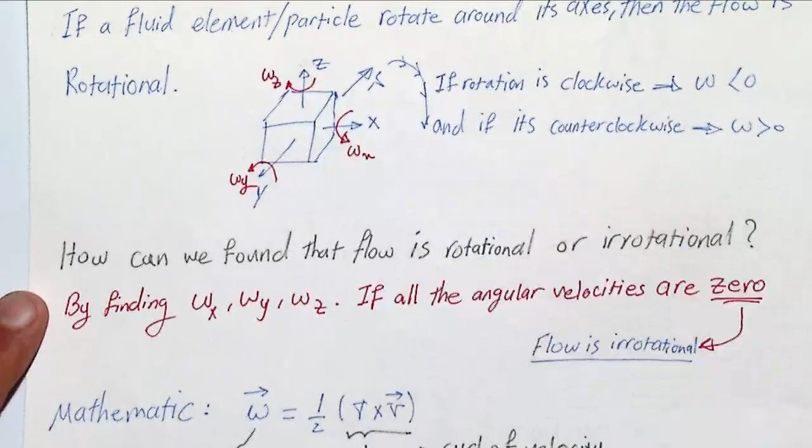The question is how can we find that a flow is rotational or irrotational. It's easy: if the angular velocities are 0, then the flow is irrotational. But if any of these are not 0, then it's absolutely rotational.

Mathematically, you can find omega, the angular velocity, by getting the curl of velocity, and you need half of it. So omega is a vector with omega x, y, and z in i, j, and k directions, and it's the curl of velocity. The curl is gradient cross v, calculated by the determinant of the matrix: i, j, k, d/dx, d/dy, d/dz, u, v, w. Don't worry about it because I wrote it down here.

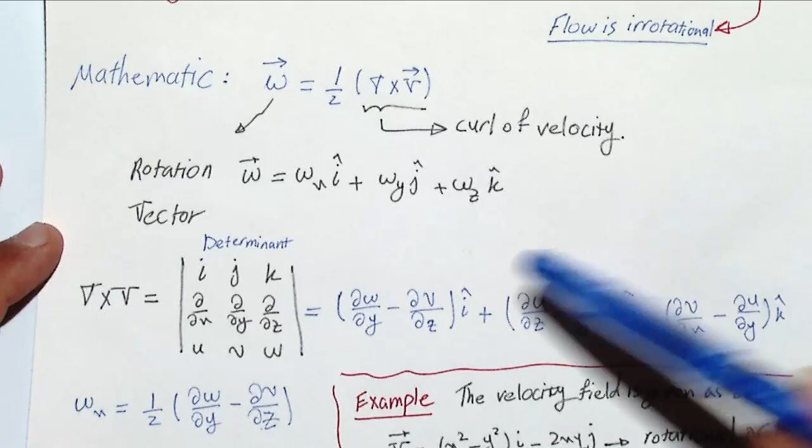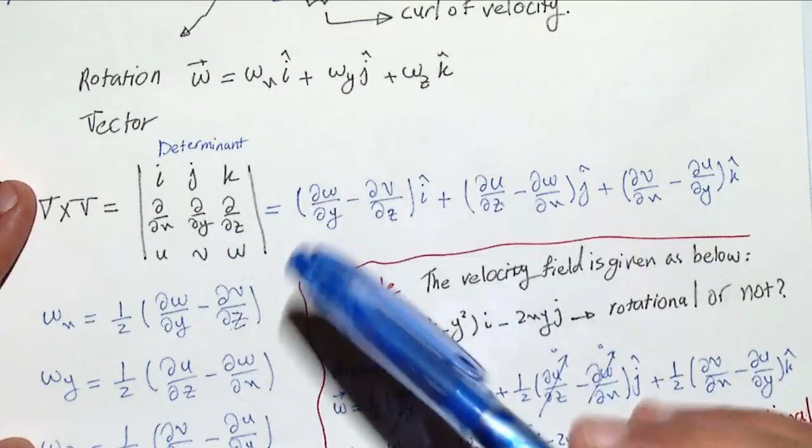You can just write this equation. I will give you access to the notes for the homeworks, and in the final you are allowed to bring an equation sheet and write it down. I will also give you an equation sheet with all these equations. So that's the simple part. If you don't know how to get the determinant for a 3x3 matrix, just Google it and find it in mathematics books.

Here would be your equation for the three omegas: omega x, omega y, and omega z. But remember, omega is half of the curl, so multiply by 1/2 on each of these terms.

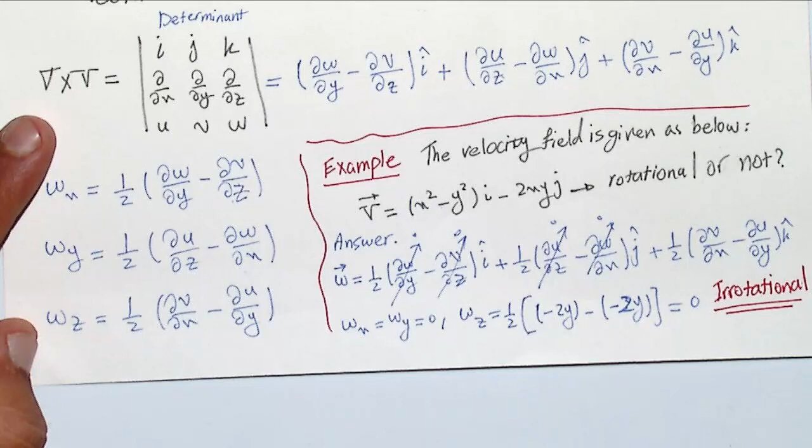Example: velocity fields given as vx, vy, and w is 0. Is the flow rotational or irrotational? The answer is you use omega and find the amount for each. Write down the equation, multiplying by half, though the half doesn't matter when checking if it's 0 or not—it only gives the correct magnitude. But keep it, because that's the correct equation for omega, the angular velocity.

Since W is 0, all derivatives of W are 0, so I make two terms 0. Also, U is not a function of Z, and neither U nor V are functions of Z, so the derivatives of V and U versus Z are both 0. So if the flow is 2D, I only have rotation over the Z axis.

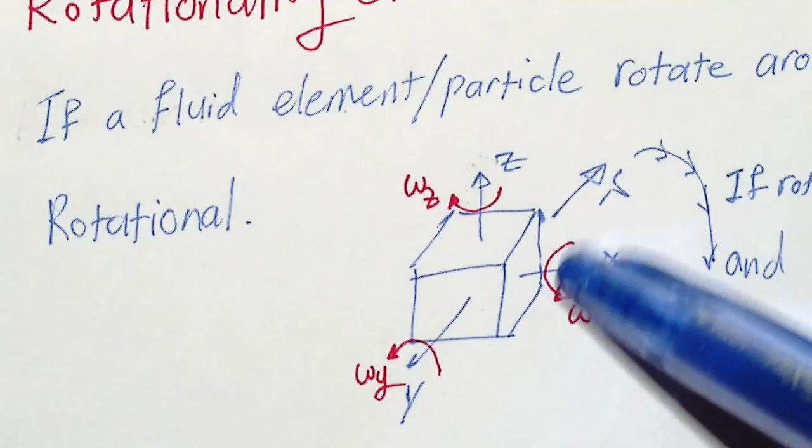It makes sense because the flow is 2D. If it moves in this way, it's not moving in the Z direction. The only way it can turn around itself is because of the velocity it has in X and Y direction, giving a rotation around Z. So for 2D flow with only X and Y velocity components, the first and second terms of omega are 0, and only the last one remains.

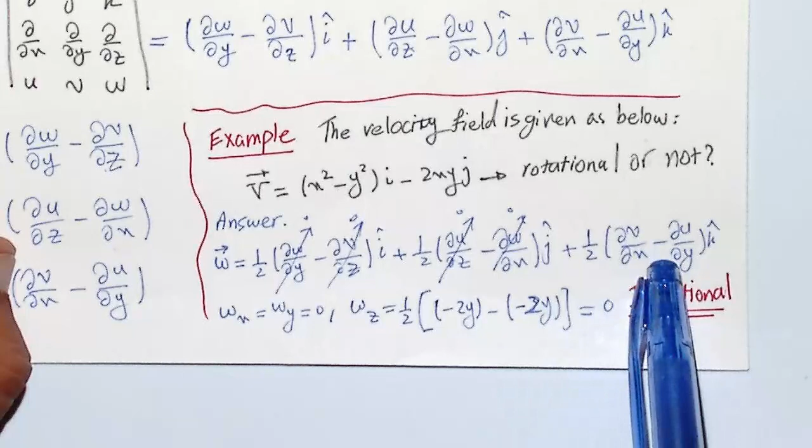So you find 1/2 times the derivative of vx over y. We find omega x and omega y are 0, and omega z is 1/2 times the derivative of v versus x minus 2y, and u versus y is minus 2y, but there's a negative sign between these two. If you put that in, you find it's 0, based on the cancellation we have here.

Then the flow is irrotational. That's the way you can find out if a flow is rotational or irrotational using the velocity field.